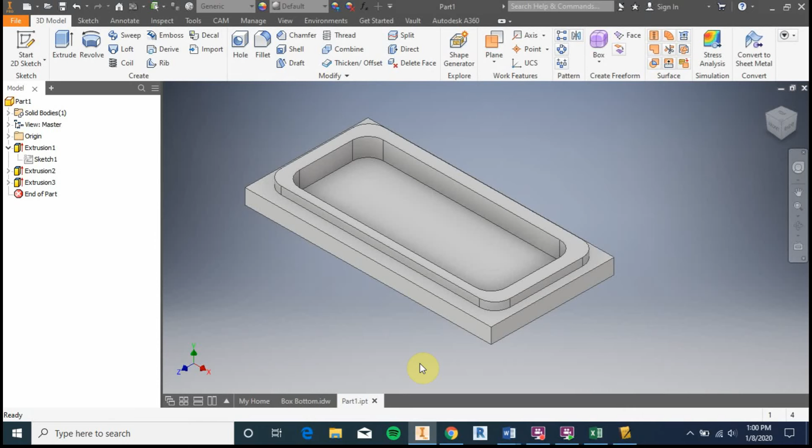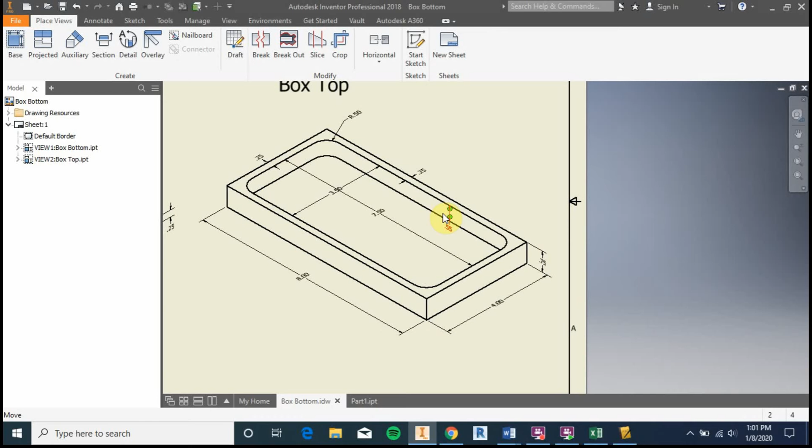Now that we have the box bottom complete, we're going to move over to the box top. I'm going to take a look at our drawing sheet. We're going to use a similar process to what we did on the first one. We'll start with the outer perimeter, the 8x4, extrude that up a total of 0.75 inches. Then draw the rectangle on top, position it correctly, fillet the corners, and cut that down to a distance of 0.55.

So we'll go ahead and do that in Inventor, starting by creating a new part. You can do this a couple ways: click on the Home button, or just do a new file from here. I'm going to click New and create a standard IPT, which is just a regular part file, just like we did on the box bottom. Double click on that and we get a new design window.

Just like before, we're going to start a new sketch. We'll click on the top plane just like we did before, and rotate this so we're looking at it in the correct view. Then rectangle, click, click.

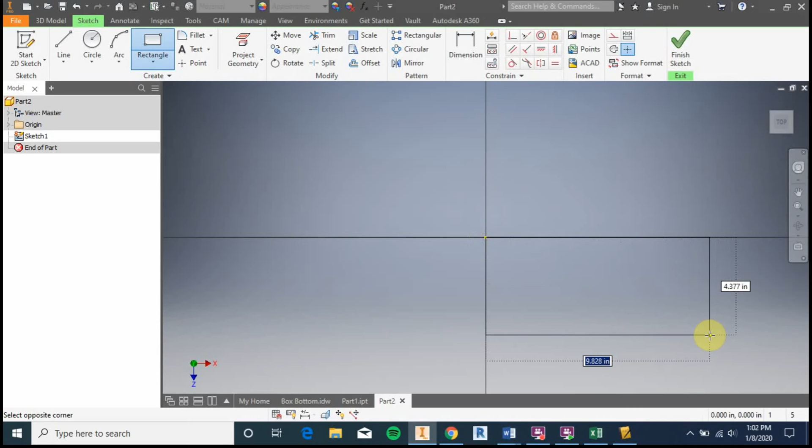We're going to dimension, click and place the dimension, then change that to 8. Then click and place the dimension, change that to 4. Finish that sketch, and use the Home button to zoom out.

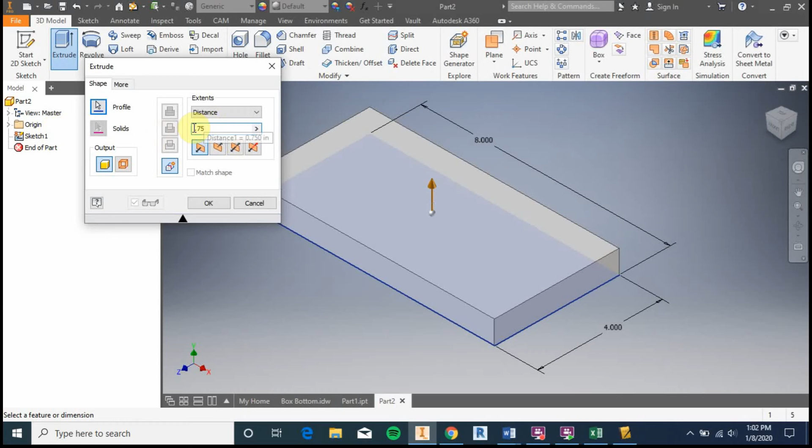We're going to extrude that to a depth of 0.75 inches. Change this to 0.75, and since it's the first one, it's not going to give you the option to join or cut. So we'll hit OK.

Now we're going to create the pocket on top. We'll start a sketch on the top view, center that, and draw a rectangle here.

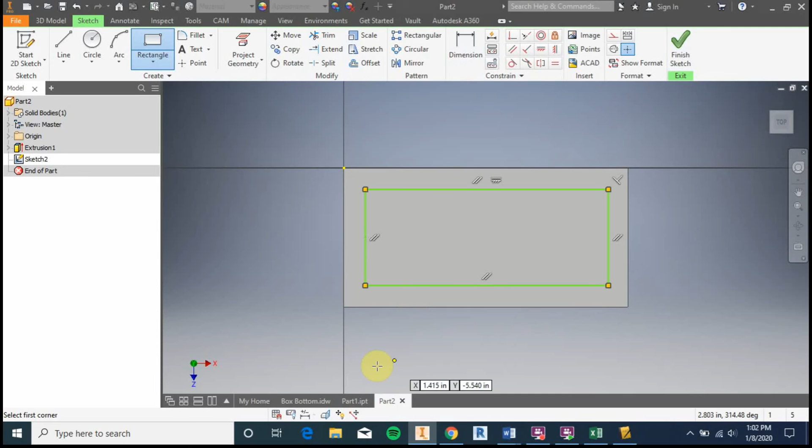For our dimensions, we need to check the drawing sheet. It says I need a 3.5 by 7.5 pocket. So we'll go to part 2, and dimension this so that this is 3.5, and dimension this one so that it is 7.5.

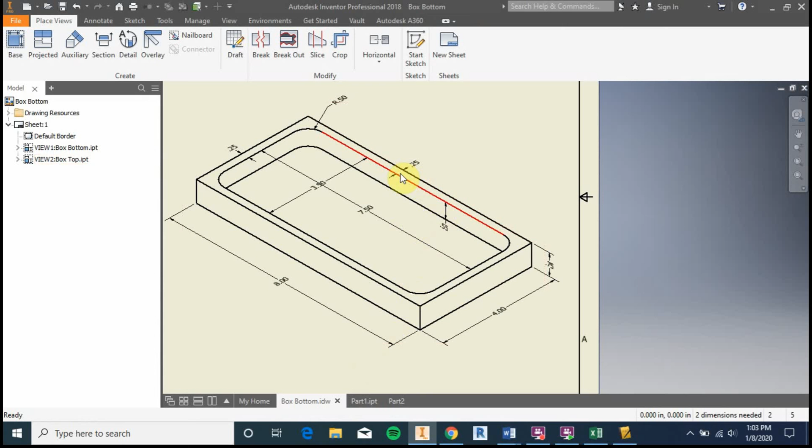Alright, so that does it, looks even all the way around. Again, we can check it, so we'll click, yeah, 0.25 there. It won't let me place that one - it'll give me an error, see?

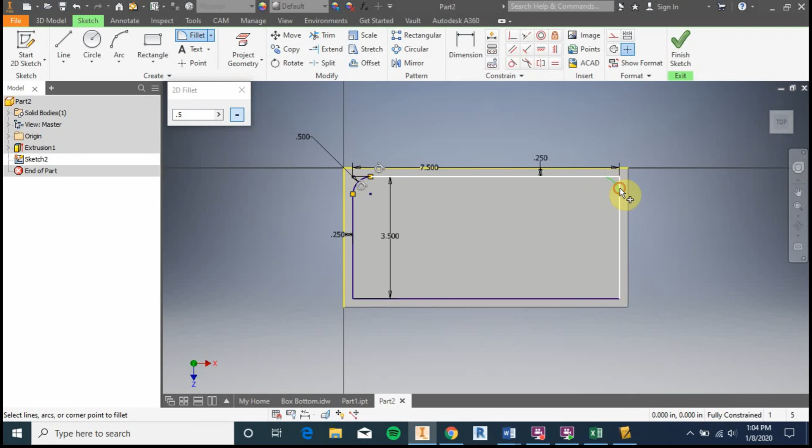So we'll cancel that. The next thing we're going to do is a fillet. It says our fillets are still 0.5 inches in radius, so we'll change that. We'll leave it highlighted, don't close this, and then click, basically clicking on the 2 lines we want to place the fillet on, and we are good to go.

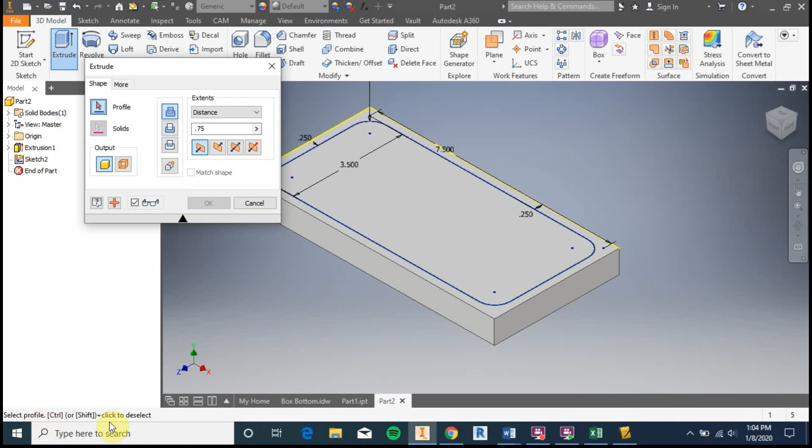We're going to finish the sketch there, and then extrude. Remember, if it's highlighted in blue, that's what it's asking you to do, and it's also giving you directions down here on the bottom left. So with this highlighted blue, it says select profile, and then I can click on that.

Right now it says we're going to do join, which is add material. I would rather cut material out of this, and the distance I want to cut is 0.6, I believe. Let's check - no, 0.55, so I was wrong. So we're going to make this 0.55, and then go ahead and hit OK.

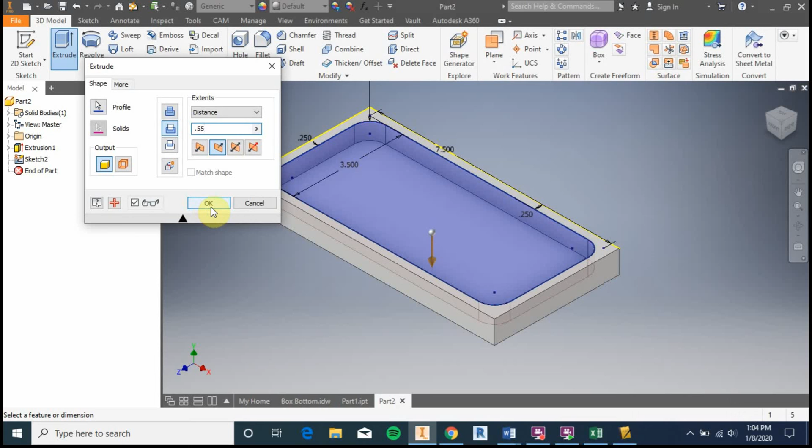Alright, so we have the box lid done. In the next video, we're going to go through and create a custom design on the top of the box, on the very top.